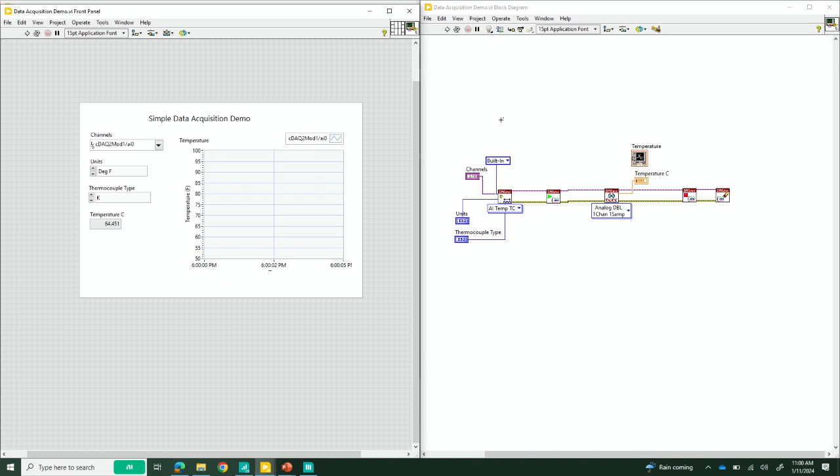In our latest release from last year, 2023 Q3, we added some new productivity enhancements like zoom, right-click, double-click to finish, and I can show you them right now. Yeah, I was going to say, you don't get away without a demo. Let's actually see these things.

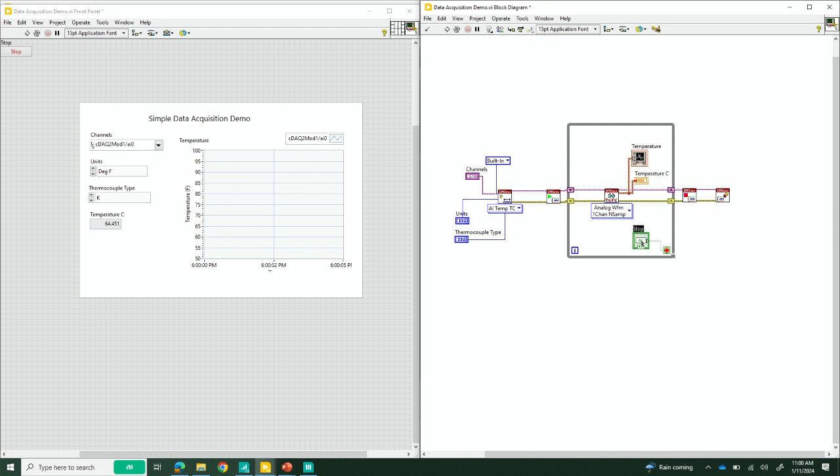So here, I'm going to go ahead and create a selection, and then I can hit Control Space, and my structures palette will pop up, and I can easily create a while loop right there. I'm going to go ahead, change this to a while loop, change this to a waveform, and then wire that in here to the output as well. And then when I start a wire, I can easily just double click and that'll automatically create a stop button, which is really nice and convenient. And this is a pretty small thing, but if I wanted to zoom in and out or make it bigger, as you know, this program isn't too large, I could do that right then and there, and then run the program just the same.

That's great. I've been coding in LabVIEW for 15 years now, and it's great to see every year these little enhancements actually make a real difference, just to make it easier, and a lot of them actually come from our community as ideas that we can then build into our program.

Now, talking about community, we talked about collaboration, maybe with your peers. What have we added to LabVIEW over the last year which helps for that? One of the big areas of investment we had over the past few years has been in Python. A few years ago, we introduced the Python node, which allows users to call into Python, and we've always kept up with each release, the most active version of Python. Then last year, we even added the ability to call into virtual environments, so you can have multiple Python sessions in your code, and it even gets us a little bit closer to the development workflow of a Python engineer.

That's great. I know there's a lot of people using Python out there, and if you're a LabVIEW user but you've got colleagues in other languages, it's great to be able to work with them and not compete with them. What else have we got?

We also did a partnership with JKI to work on package-related workflows. This really makes sure that you're able to better package your code, manage dependencies, and open and share code with your team members. So that's another big area. That sounds great, anything else?

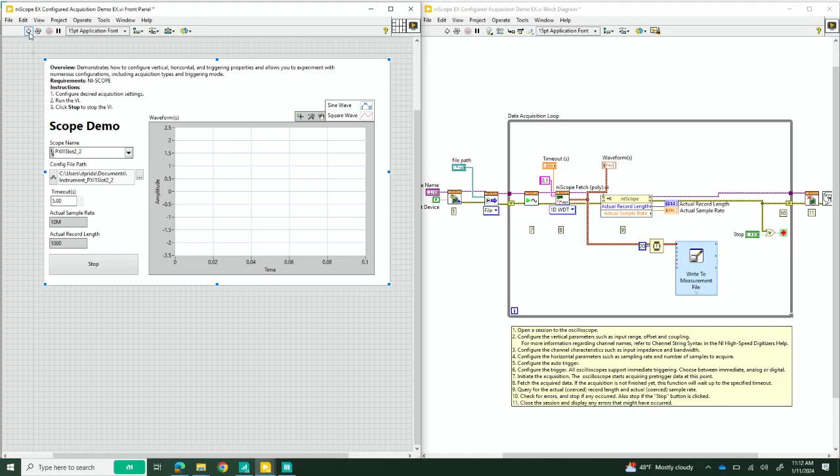Let me take this measurement really quickly. I never hit run, but here we can see our data. We've acquired it, we saved it to a file. Now we can go ahead and open this up in DIAdem. DIAdem is our measurement data analytics tool, so we're able to view our data, analyze it, and create reports to share with our team members.

So right here, I already have it indexing my documents file, and I can see the data right here. Now, creating a chart in Excel can sometimes be a pain in the butt, but with DIAdem, it can be just drag and drop.

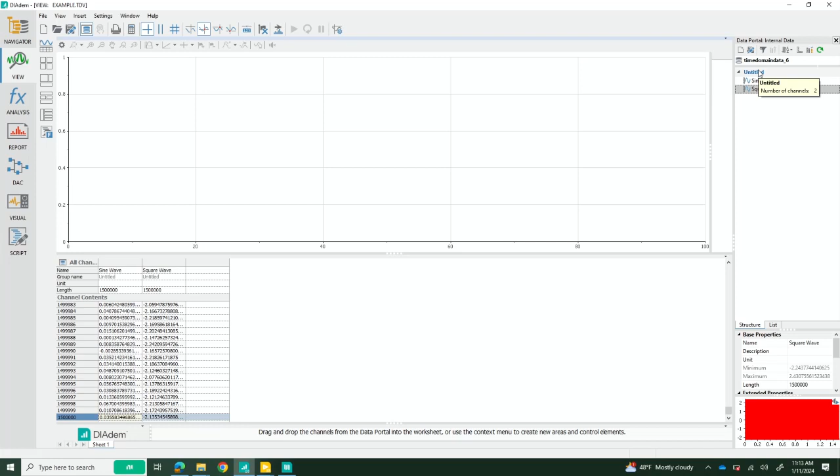So if I drag the data that I loaded right there, I can go ahead and view it in seconds, really quickly, and zoom out however I wanted to—it's really nice and neat. Then, going even further for sharing these findings, I can create a report so I can just share it like you were mentioning.

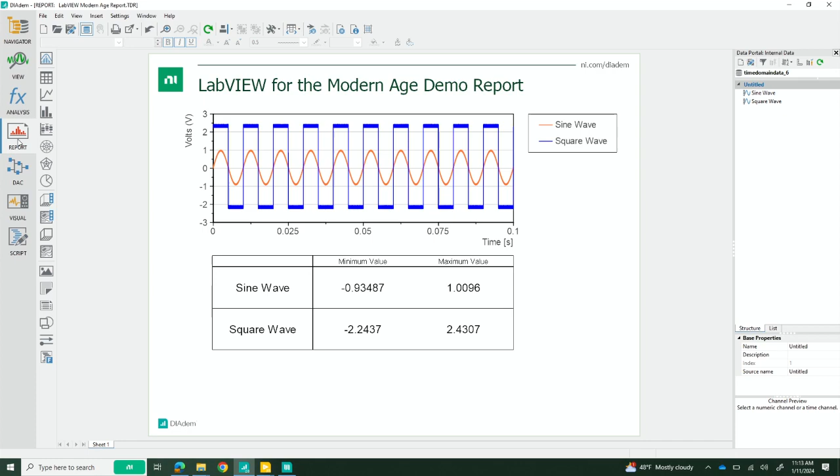This is fantastic. I know that this kind of data manipulation isn't always easy in general purpose tools, so it's really nice to have one designed specifically for test and measurement. For this validation workflow, we've got Instrument Studio into LabVIEW and now into DIAdem as well.

Well, thank you so much, David, for sharing that. Awesome, thanks Graham. This hopefully shows the value you can get from LabVIEW Plus—building on LabVIEW with some of these other tools into an ecosystem, but remaining with LabVIEW at its core.

Now, for an electronics product, they're going to go from this validation we've discussed into production, to manufacturing. There's a whole different set of needs. To talk about how LabVIEW Plus adds value in an electronics production setting, I'd like to invite Grace to come up and show us the different tools and give us a demo.

Hi, Graham. Thanks for having me on today.

Now, I know in production, the engineers are going to be really focused on meeting those tight NPI schedules, despite the fact that their products are getting more complex. They've got more to do, they've got less time to do it, and probably less people on their team. There's a real productivity crunch here, as well as a test coverage challenge.

How does LabVIEW Plus help with this? Yeah, that's a great question. So we can start talking about the workflow and what that looks like. It all starts with the measurement and the instruments you're using, and that's where Instrument Studio comes into hand. Instrument Studio is just the software equivalent of the front panel you'd see on your box instruments—a really easy way to get a quick start for your measurements, configure that, and then actually import those configurations into LabVIEW so you can get started really quick.

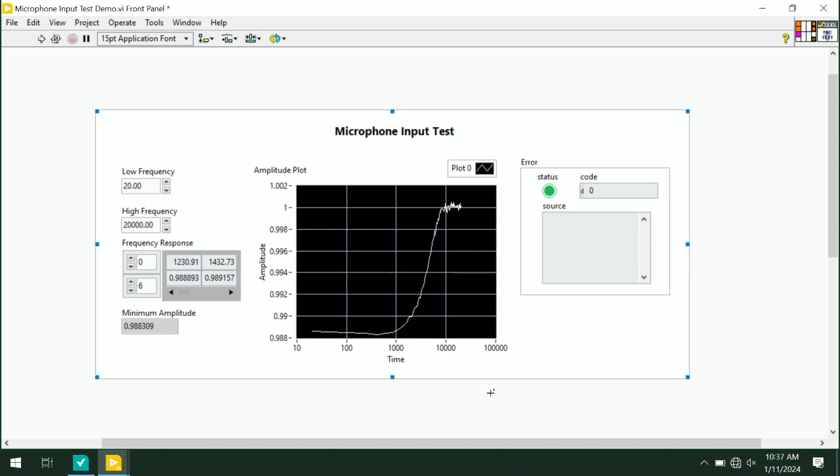We just want to do a frequency sweep from 20 to 20,000 hertz, and this is how we've set up our front panel in LabVIEW. So we can go ahead and run that, and you'll see how it plots that really quickly. This is just a great way to get your measurements and see those results quickly.

But like I mentioned, with a mobile phone there's a lot of different tests you're going to need to do, and that's when you might look to a test executive or a test sequence to start organizing that—that's where NI TestStand comes into play. And that's perfect, because we're talking today about LabVIEW Plus: this is LabVIEW for your test steps, plus TestStand for your sequencing and the automation of those tests.

So let's have a look. What does TestStand look like? Maybe you can talk us through the environment and how someone might use it. Yeah, so this is TestStand. Right here you're going to see our sequence editor—this is where you can implement your test steps. Like you'll see here, we have power on, battery, RF, audio. These blue boxes are just subsequences, so you'll see here we have our microphone input test that we just showed in LabVIEW. And then over here on the left is our insertion palette.

You can make code modules in other programming languages. TestStand can implement LabVIEW, C, .NET, Python, which is really great for collaboration if you're working with other engineers. A lot of test groups have a library of test code or IP they've built, so this allows you to reuse and collaborate with your peers or across your organization.

Another thing on the insertion palette I wanted to point out is flow control. So like normal programming languages, you can implement if-else statements, for loops, while loops, so that if a test fails, you can implement stuff like that.

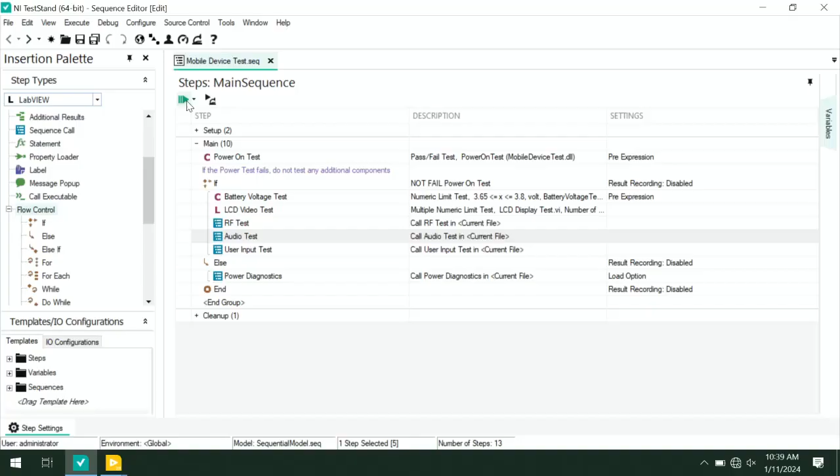So let's have a look at it running. What does it look like when you use it itself? Yeah, so if we run this right here, you'll kind of see what the operator interface would look like. You can implement a serial number, which is really great for traceability on large production floors. We'll just skip over that.

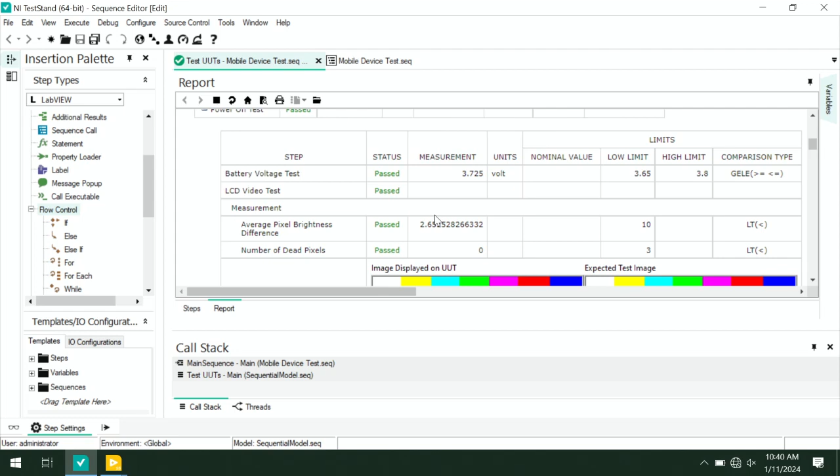This is our mobile device that we're testing, and we're going to have everything pass. So you'll see our test sequence passed, and we automatically have a report that was built. This is all of our data that was collected from the report. You can customize this and put images in, and you can see the graphs of the data that we implemented.

There's a lot of functionality there. You can even make this a PDF or use HTML. So a lot of customizability.

That's fantastic. Well, Grace, thanks for joining us today and really showing us this LabVIEW Plus workflow of Instrument Studio into LabVIEW into TestStand. Awesome, thanks. Thank you so much, Graham.

So as I said, this production test workflow has 3 different products. You've got Instrument Studio for the configuration of those steps or measurements, LabVIEW for building out those individual test steps, and then TestStand, this powerful configuration-based tool which allows you to automate and build up more complex sequences.

And so with this, I'm really pleased to invite Eric, our product manager for FlexLogger, to come and talk about some of this software. Now I know in these use cases, Eric, they're going to be working in a workshop or a garage or even a larger test cell. It's a very different environment to the electronics lab or the manufacturing floor. Talk us through what is FlexLogger and what's it for?

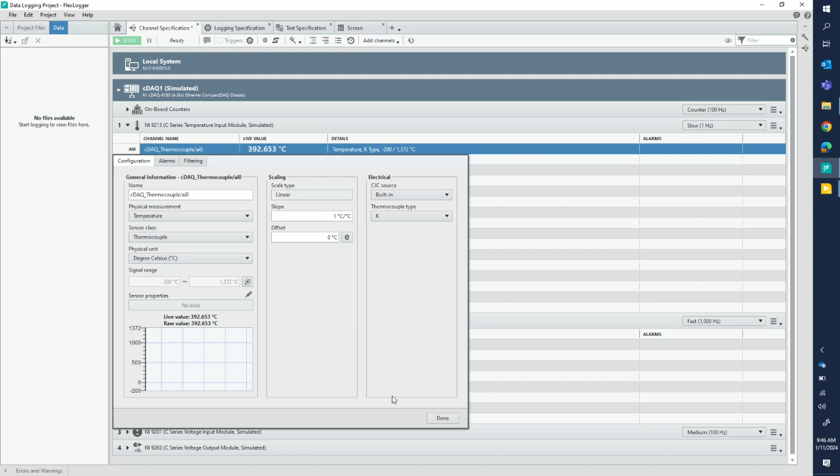So here I have a project already set up in FlexLogger. I've got my hardware already discovered. I'm just going to go through and configure a couple channels, so let's start with a thermocouple channel here. As you can see, FlexLogger has a bunch of defaults already pre-configured, and it starts capturing data right away so you can validate that signal and make sure everything's working the way you expect.

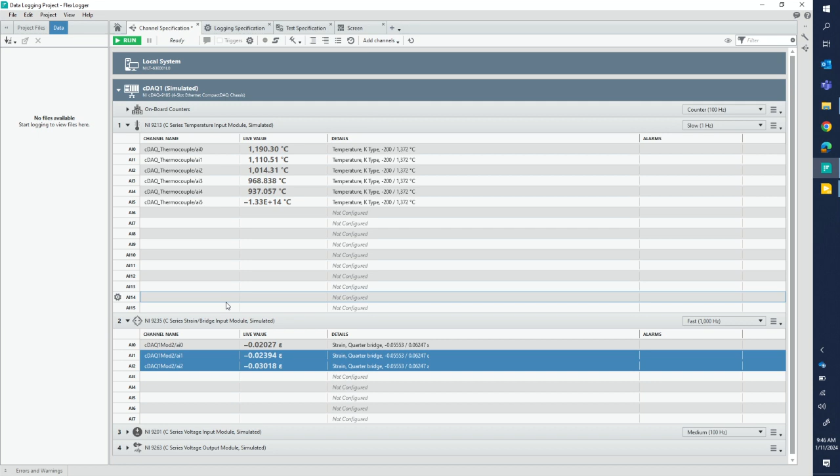Let's make a few more of those, because we don't just want one channel—we want to scale it out to multiple systems. So I just did a quick copy-paste there to make multiple channels. And let's mix it up, add a couple different sensor types. Let's add some strain measurements in here as well, and I'm going to configure a couple just by copy-pasting. There we go, we have a system ready to go, ready to start recording data.

That sounds great. Let's look at the results—can you get a graph, and how does this work? Yes, definitely. Let's set up a couple live visualizations, and this will look pretty familiar to all our LabVIEW users, very similar to a front panel. So let's put on a couple graphs here so we can visualize all our thermocouple data, and let's start getting some strain measurements in here too.

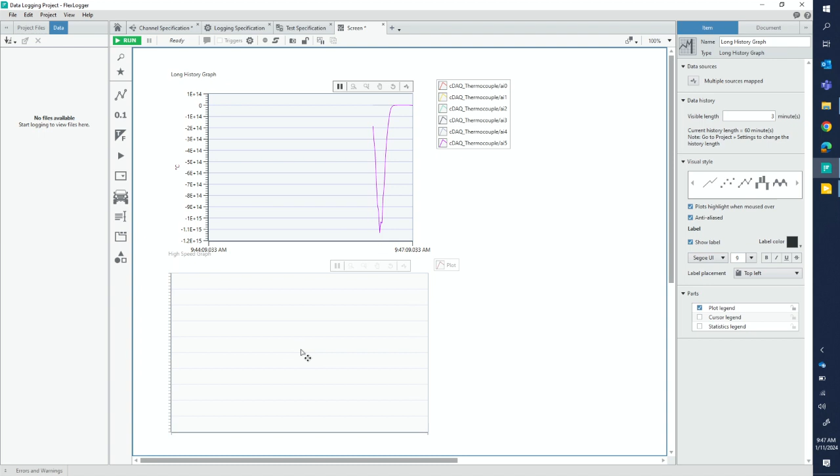What I really like about FlexLogger is this hardware-centric workflow, which starts from configuring your channels. That makes me think about plugging in my sensors, mounting my sensors, and then immediately setting that up, bringing that up into the software. But so far what you've shown me, you could do in LabVIEW. Why would you do it in FlexLogger and not just LabVIEW?

Right, yeah, you're absolutely right—you could do all of this in LabVIEW, but it's going to take time to program all of those systems, all of the components of your test system. This gives you a much higher level starting point. It's especially good for users who don't have programming experience as well. That makes sense—often these labs have a lot of technicians, other groups or engineers who are specialists on the mechanical side, and they're not wanting to program or start from their software development every single time.

But we're here to talk about LabVIEW Plus, so what are the occasions when you need to use FlexLogger plus LabVIEW? Yeah, so I'd say any time that FlexLogger out of the box doesn't have everything you need, that's where the extension point with LabVIEW works really well. So if there's some third-party hardware that you want to integrate into your system, some custom measurement and algorithm that you want to run, or even just communicating with the rest of your test system.

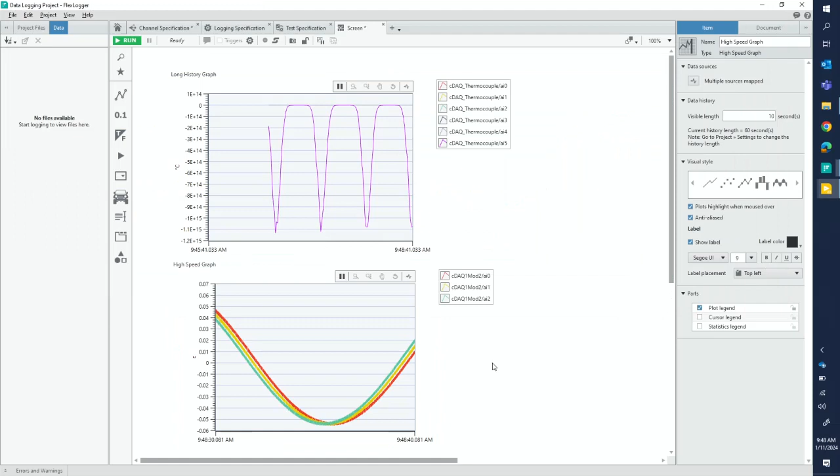Go on, show us, we're here to see a demo. All right, absolutely, so let's open it up. Here's just an example of a FlexLogger plugin—it has everything you need, the PDF, the manual, and it's broken down into all the steps, already predefined and ready to go, so that you can just plug in the code for your custom measurement, your hardware, your communication. I'll just copy-paste that code right into here. And once you're done, once it's built, you add it into FlexLogger like you would any other channel.

So let's say I did this Rosette plugin, and I want to do a calculation on those strain channels that I added. I'm going to go through and configure all my strain measurements in here, get this last one in, and there we go—just as if it was native to FlexLogger. I have a plugin ready to go.

So I love this. As a test professional, I like to think of this almost as the analogy of a blacksmith shop. When you come into a blacksmith shop, there are a few tools, but the master blacksmith, that professional, will build new tools every day. Every time you build a tool, that's then there in the shop for others to use. So everyone in that shop gets more and more capabilities as the professional builds the tools and adds them into the workshop. And so we've gathered some data, we've logged that, we've customized that and brought in some special tools, usually in a workflow for this sort of electromechanical validation.

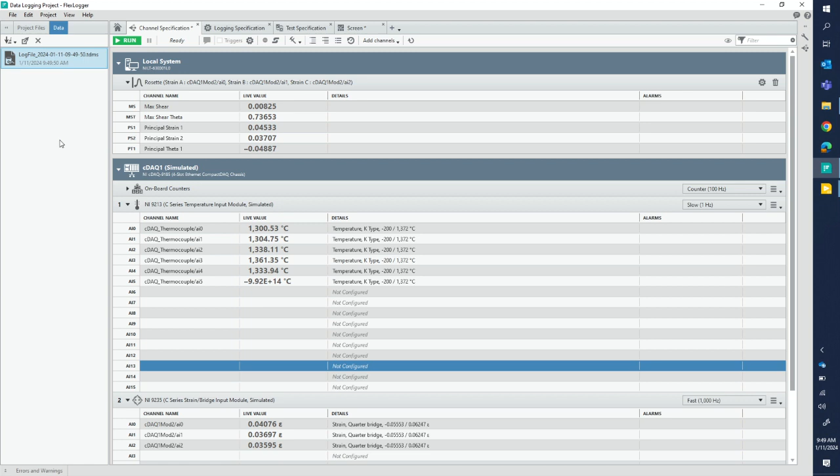We're then sharing that back to R&D. So what from LabVIEW Plus would I use for that? DIAdem would be the tool of choice for that. So let's log a little bit of data here—we got all of our test system up and running. Let's record a couple seconds of data and show what that looks like. So here I'm just going to open up that file that we recorded, and DIAdem will open up and help us visualize everything.

So you've got this built up on your demo machine. This is DIAdem. We can see the data we've used and then use that to compare with previous data sets we've had, or even build reports, right?

Correct, yep. And with DIAdem, it's really easy to inspect and visualize all that data. Just click and drag, build up all sorts of waveforms and graphs.

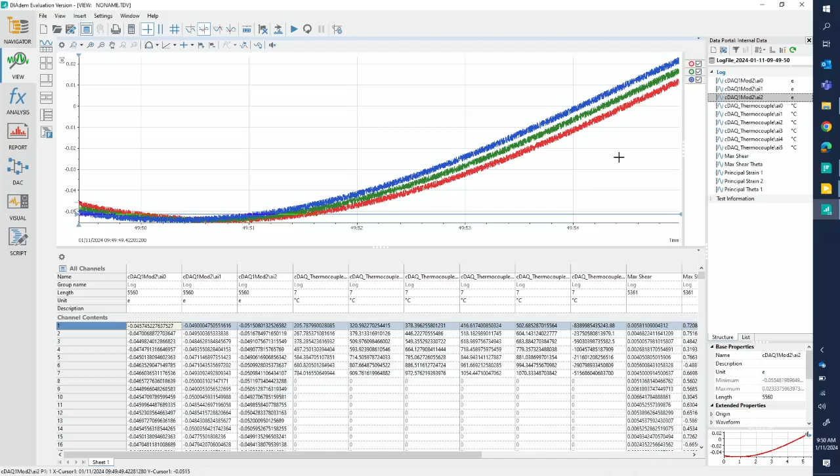Okay, so we've talked about LabVIEW Plus in these different workflows or personas. Now let's talk a little bit more about how these are going to progress and what the future or the roadmap looks like for this LabVIEW Plus suite.

Best person to do this, I'd like to welcome Eric Riffet, our Director of Product Management, working on LabVIEW for decades at this point. Tell us, what does LabVIEW mean to you? Let's start there with the basics.

Sure, and you've just been showing some really great examples. LabVIEW, of course, is a graphical programming language. It's specifically designed to accelerate development in test and measurement systems. With over 30 years of experience, a lot of tools have built up over time - we have thousands, tens of thousands of instrument drivers online. We have this wide community of users that help each other with their development tasks. And it's the most productivity generating tool that you can use in test and measurement.

Okay, so in short, LabVIEW is awesome. Why LabVIEW Plus? What does LabVIEW Plus bring? You've shown a lot of really great demos of what the idea is with LabVIEW Plus. So it's LabVIEW plus all of the other things that you want to be able to do. LabVIEW is awesome as a tool for being able to accelerate your development time. However, it's not advantageous to always start from ground zero and build an application to do everything.